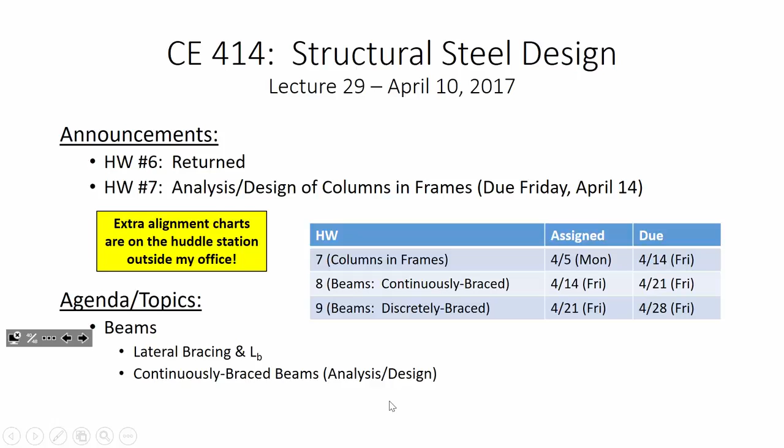The one thing I do want to show you all a little bit on this homework is problem 1. I do want to spend some time on that because I know there were some odd plots. First off, your plot should have looked like this, okay? It should have had this sort of shape to it. And in terms of constructing the plot, a couple of things.

Number 1, if you go to your handouts, I think it's column handout 2—yeah, this one. And you look right on the first page, there's your equations right there. So they were literally right there. The only thing this does not have is phi, you have to adjust it by 0.9. So let me show you how I did this.

What I did is I have KL over R from 0 to 200 right here, and I have my elastic, or Euler buckling capacity calculation. Now, at KL over R equals 0, you're dividing by 0, so it's essentially infinity, but it doesn't really matter, which means your F critical is 36. But the big thing I want to show you is this formula right here.

So here's what this formula is saying: it's basically one big if-then statement. It's saying if your KL over R is less than or equal to 4.71 times the square root of 29,000 divided by Fy, whatever Fy is, then your capacity is 0.658 raised to the quantity Fy over Fe, times Fy, or it's 0.877 times Fe. And that's it. Then just copy and paste, to make sure you're locking in your Fy, because that doesn't change.

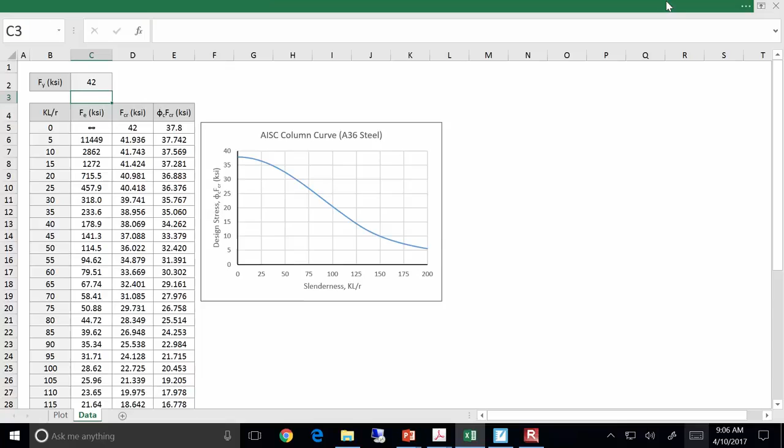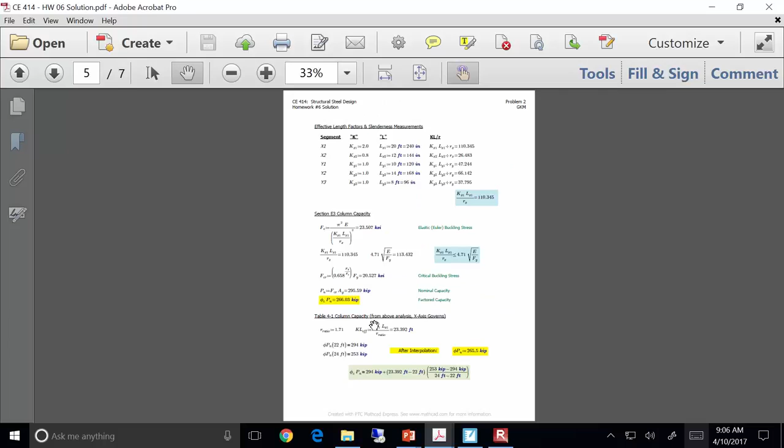Okay, now for the rest of the solution, let's see. I think the big thing was just making sure you're getting the right lookup values. Let's see, I think your KL over R for problem 2 ended up governing in the x-axis. It was about 110.3, that was your KL over R.

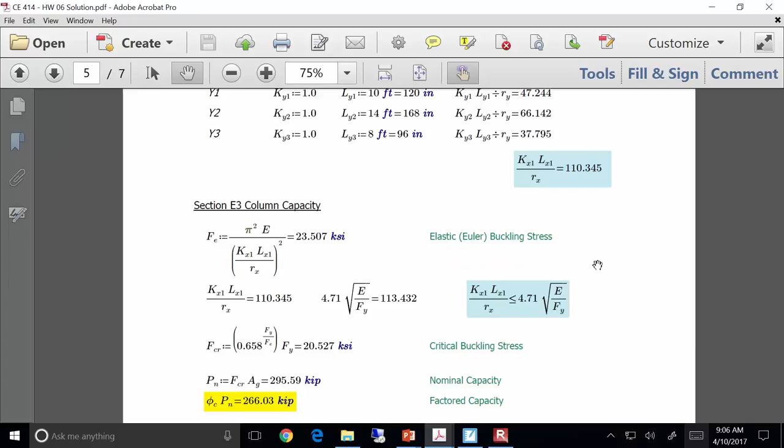So when you calculate your capacity using E3, you compare KL over R to 4.71 times the square root of E over Fy, and it's just on the other side of that, so you're still using your 0.658.

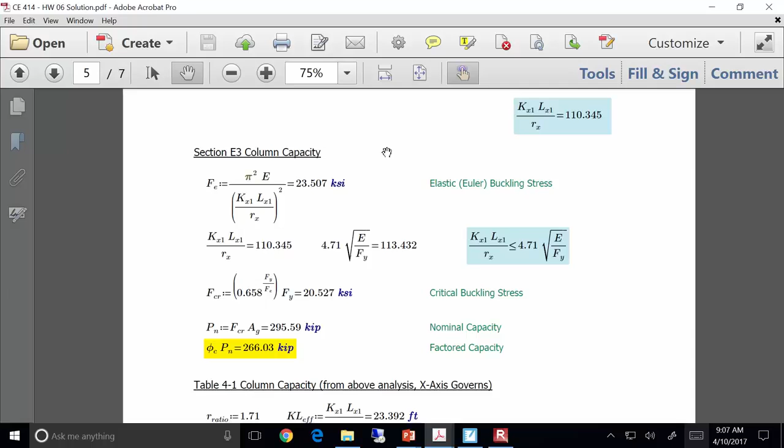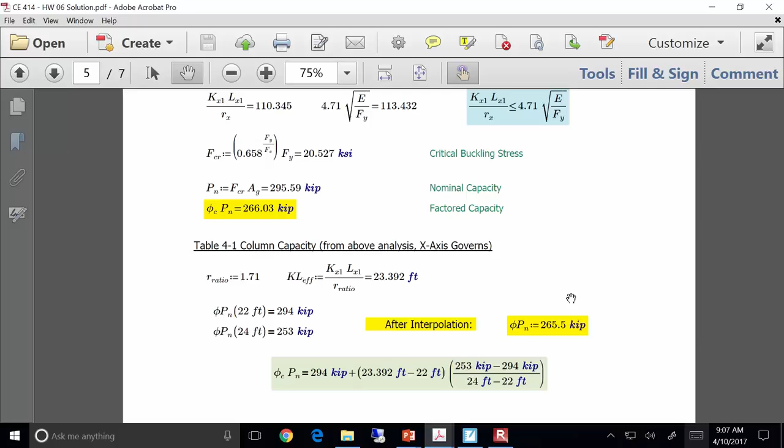You should get a capacity of around 266 kips. Now if you use Table 4.1, you end up getting 265.5. And that again just comes from interpolation, just the fact that you're assuming it's a straight line. You're assuming it's a straight line when you do interpolation, but it's not -- that's obviously not a straight line. Okay, so make sense?

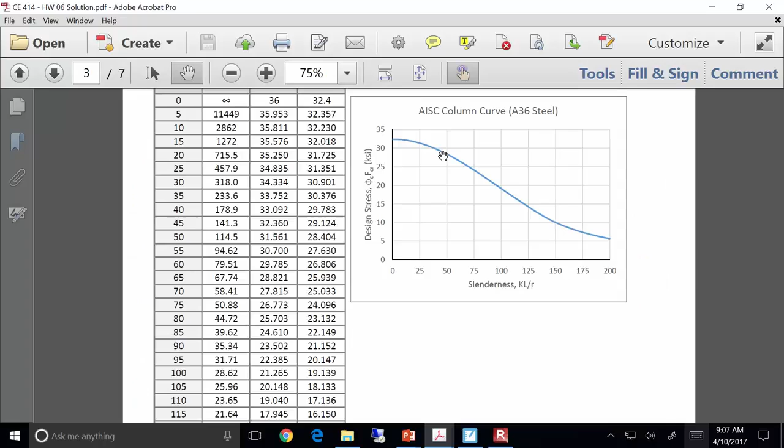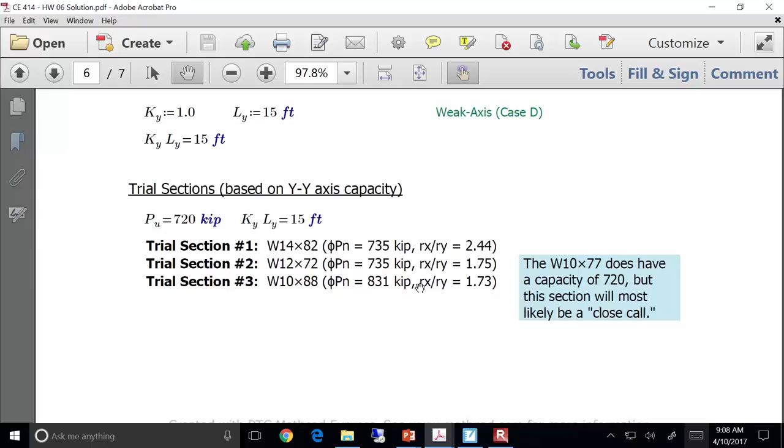Okay, now on problem 3, a couple things. So here were my trial sections. I chose a 14 by 82, a 12 by 72, and a 10 by 88. Technically I could have chosen the 10 by 77, but I think when you actually go through and choose that, you can look at it and see that's probably a close call, since its capacity is, in fact, exactly 720. So when you do your interpolation, you can probably make a guess and say it's not going to work. But I want to show you something.

So let's take a look at this. Your KL in the x direction is 36 feet, and your KL in the y direction is 15 feet. Now if you take each section one at a time, let's take the 14 by 82. Your Rx over Ry is 2.44, so if you calculate your KL effective, you get 14.75.

Now that value is less than this. Okay, and because it's less than this, you know that your weak axis governs, and whatever you looked up in that table is the capacity. So I can tell you right now, without doing any more work, the W14 by 82 will work. It will be one that works.

Now because the W14 by 82 works, I didn't even waste my time doing the W10 by 88, because if the W14 by 82 works, why would I check one that's heavier? It'd just be wasting my time, because I know this one works. So my efforts from here on out are going to be on the W12 by 72.

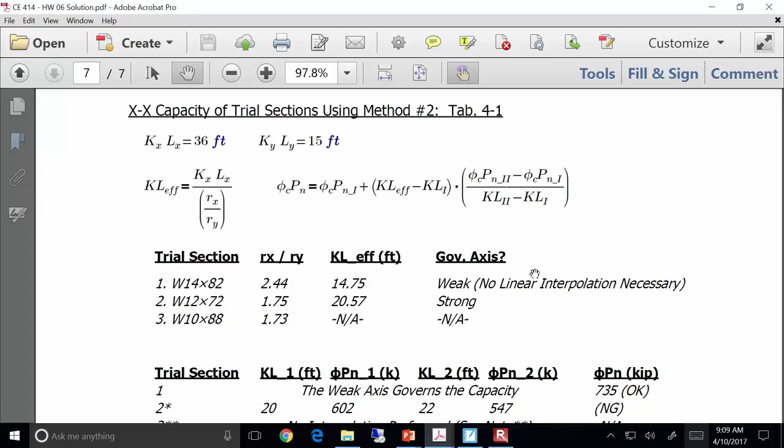Now when I divide by Rx over Ry, I get 20.57. If you compare that against this, it tells you that the strong axis governs, so you need to do a little bit of interpolation. But when you look at the interpolation you would do, you'd be interpolating between, it's what, 20.57, so you got to look up the value for 20. And since there's no value for 21, you got to look up the value for 22. So you'd be interpolating somewhere between 602 and 547, and whatever the value is between those, it's less than 720, so you don't need to do the interpolation here either.

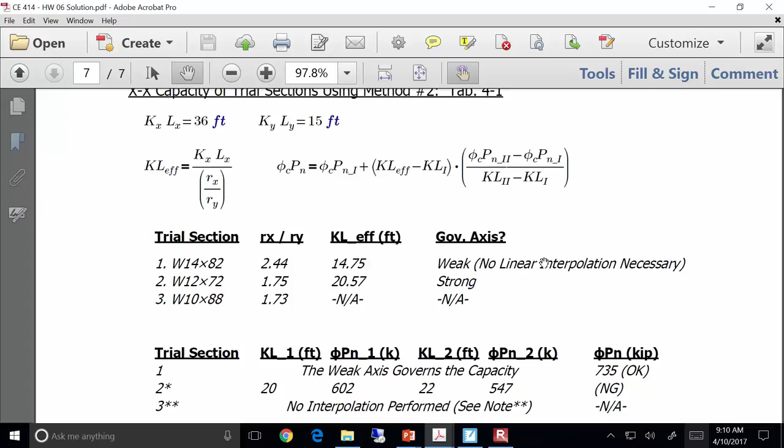So the W14 by 82 works, the W12 by 72 doesn't work, and I didn't waste my time doing the other one because it's heavier than that one. So my answer is the W14 by 82.

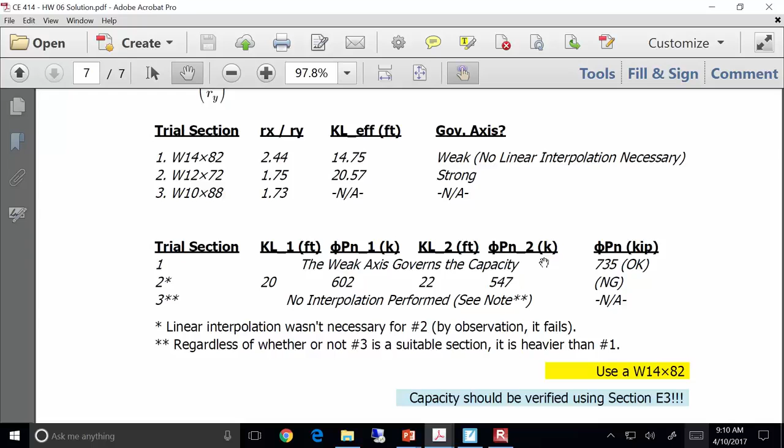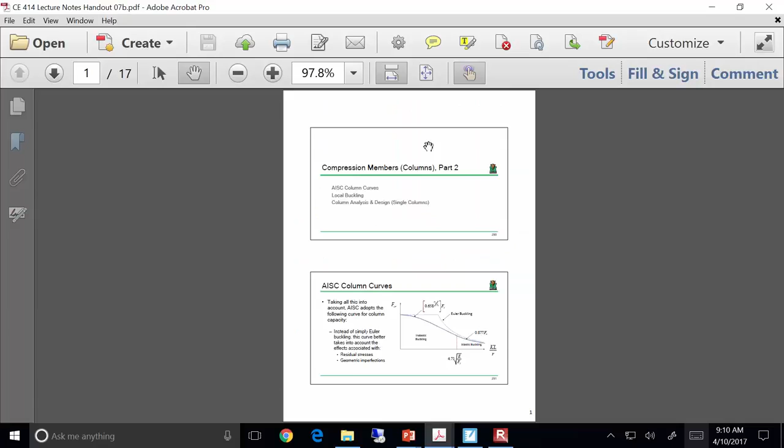Yes? So how did you determine the K values on those? Okay, let me see. Was it this one? Actually, I think it was this one. Let me see. Nope, it wasn't this one. It was this one.

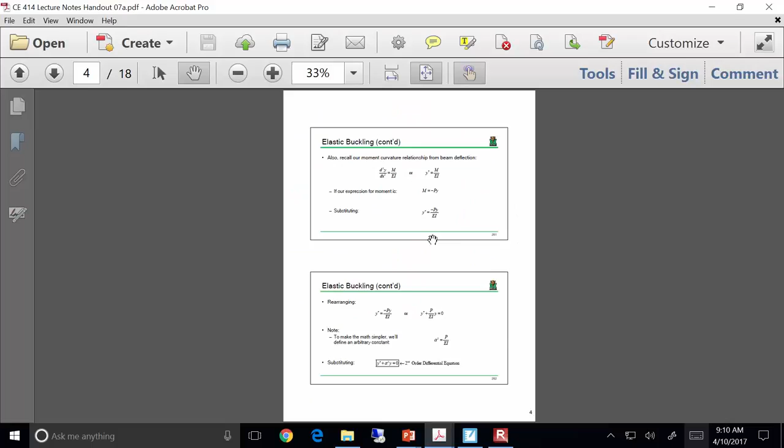Okay, first off, I can see where there would be some mix-ups there. I was trying to match the symbols on the homework exactly to the symbols in the manual. So if you notice, like that one column, it's not fixed, it has that block. Do y'all see what I'm talking about?

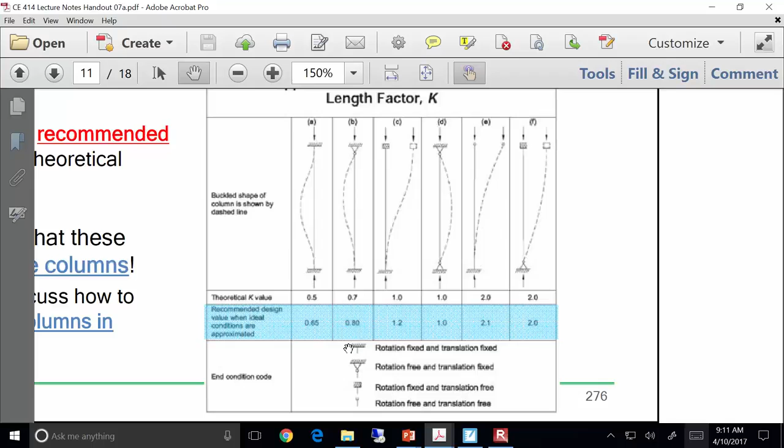The difference between, like, if you look at column A versus column C - actually, let me pull it up in the slideshow because it's a little pixelated here. Was it slide 276?

Here we go. Let's look at the difference between A and C. So if you notice, A is fixed, fixed, and C is kind of fixed, fixed. The difference between this boundary condition and this boundary condition is this one is allowed to move. It's not allowed to rotate, but it's allowed to move.

See, I was using these condition codes right here to draft out those symbols. So if you have a column that's fixed on the bottom, but the boundary condition on top is fixed against rotation but free to translate, that would be case C, and your K value would be 1.2.

Does that make sense? What's an example of that particular boundary? A moment frame, or something like a moment frame. Because what's the difference between a brace frame and a moment frame? A moment frame is allowed this way.

But you are correct - if you were actually doing a moment frame, you would probably end up using the alignment chart anyways. But to add a little bit of reality to it, when we did a lot of moment frame problems, we were getting K values like 1.2 and what have you. In fact, when you do your homework assignment, you probably are going to get K values around 1.2 for some of those columns.

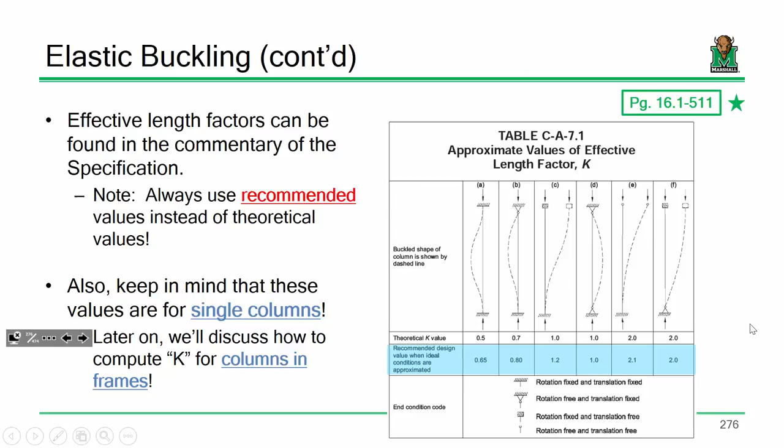Okay, all right, now what slide was I on? It was on something like this.

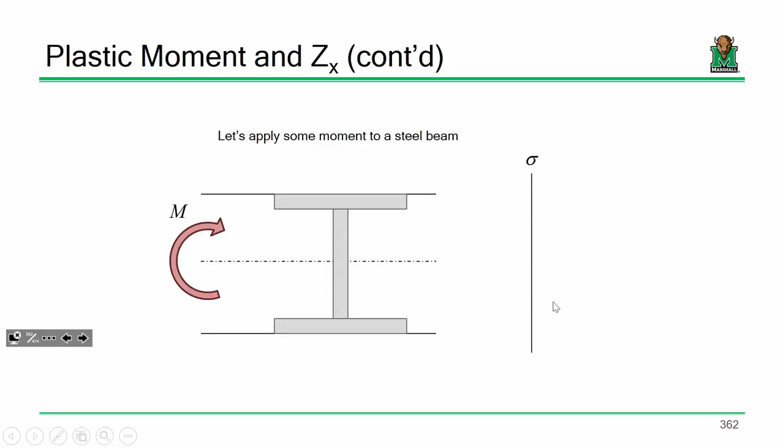So if you recall, if you have a beam and you apply some moment to it, it starts off behaving elastically, okay? And it will behave elastically until you reach the yield stress at either the top or the bottom of the section, assuming it's symmetric. Now in mechanics of deformable bodies, that's where we essentially assumed that everything stopped - once you reach some limiting stress at the extreme fibers, you're done. But in reality, that's not the maximum moment that a beam can withstand.

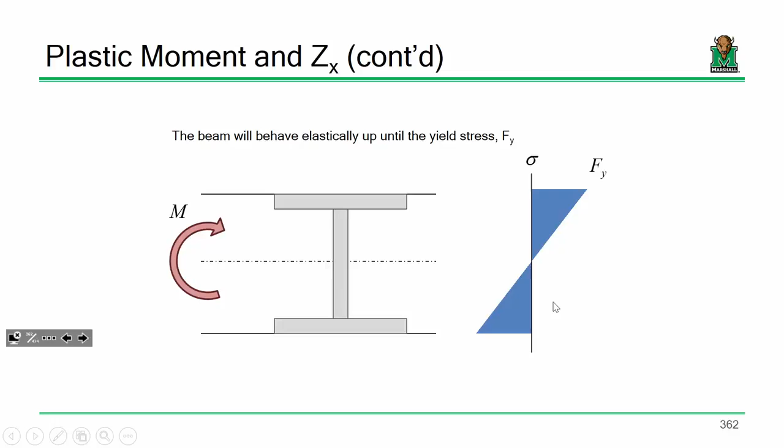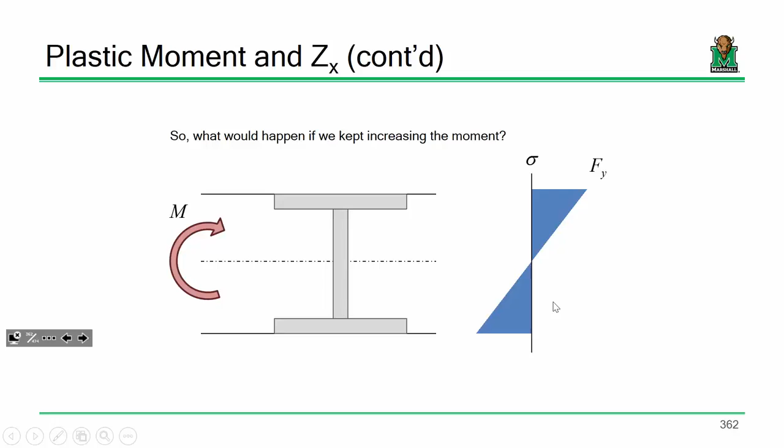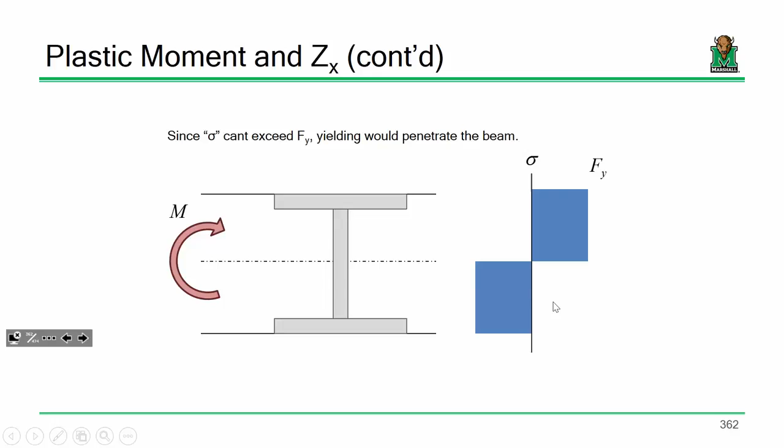Now if you keep applying moment to this, what happens is, well, the very top and the very bottom have yielded, but that doesn't mean that this is yielded or that's yielded or any of these points in the middle. So once you keep applying moment, that yielding penetrates throughout the section to the point where you've yielded the entire cross-section, and that's the point that matters. We call that the plastic moment. Any excuse I have to show that slide again, I will, because that slide's awesome.

All right, let's get to it. So last time we did an example discussing plastic moment and a new section property that we discovered called ZX. And ZX is essentially a little bit different than something like a section modulus.

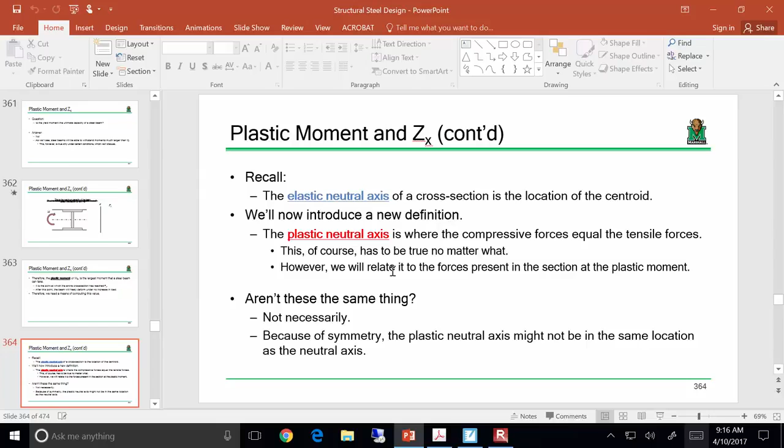Elastic section properties and whatnot are defined based off the neutral axis, or where the centroid is. Whereas plastic section properties are more about where the area above a given line equals the area below, because we're talking about compression equals tension, and they're not necessarily in the same spot. If you go through and do the math, you'll find that in many cases the location of the centroid and the location of the plastic neutral axis are in two different spots.

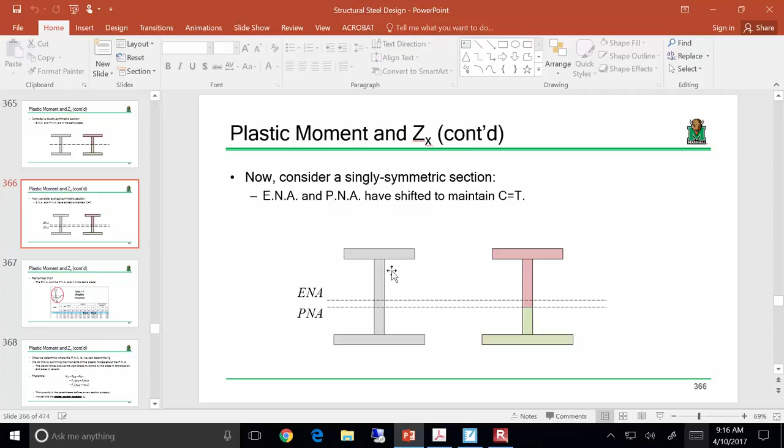And I even mentioned this in tension members a while back. I said, we have Y bar and we have Y sub P. And when we were doing tension members, I said, don't use the Y sub P.

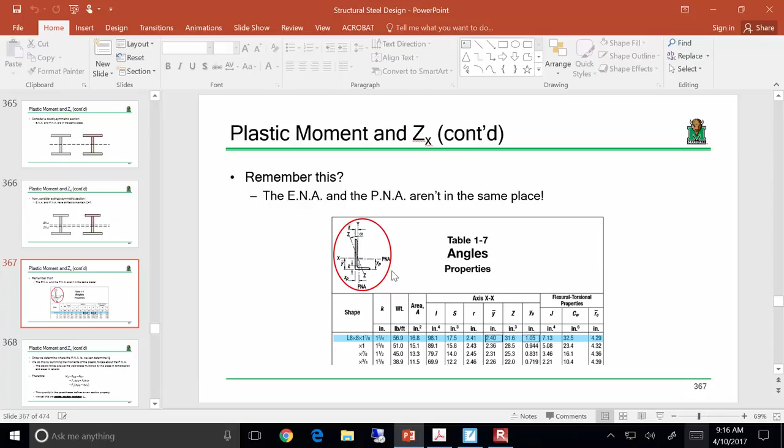Well, now you know why, because they're referring to different properties. We did an example where we computed the location of the PNA, ZX, and ultimately the plastic moment.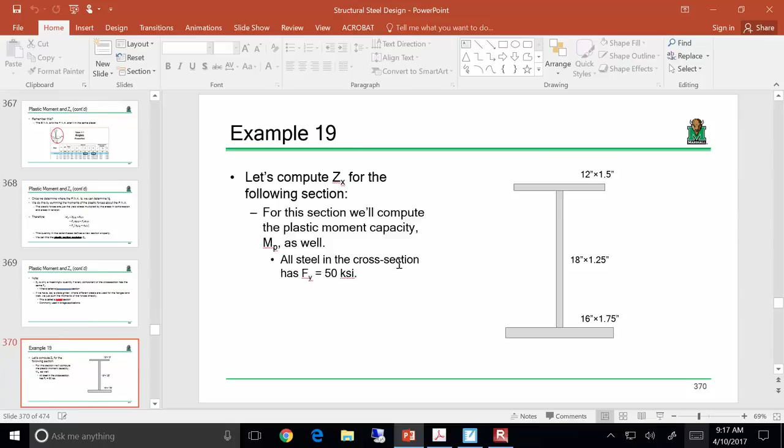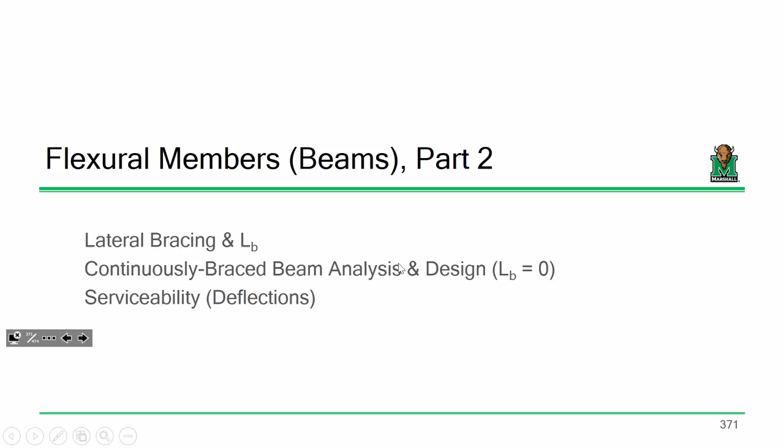Okay, so far so good? Okay, so now let's talk about beams. Let's talk about how to actually proportion them, analyze them, design them. In order to do this, this is going to be a discussion that we have for the rest of the semester.

We're going to start off making an assumption that LB equals 0. Now what's LB? We mentioned this last time. LB is essentially the distance between bracing elements for a given beam. So like with a column that was 30 foot long, we really didn't care about the overall length of the column when we were determining capacity. We cared about the distance between unbraced segments, or the distance between bracing elements.

So if we had a 30-foot long column, but there were simple braces every 10 feet, when we computed capacity we just said the L was 10 feet. We didn't say it was 30, right? Same thing is true with beams. It might be a little more confusing with beams because when you compute the forces, the moments, WL squared over 8, you're using the whole span length, but you might not be using that for the unbraced length. So it's just something you got to make sure you're paying attention to.

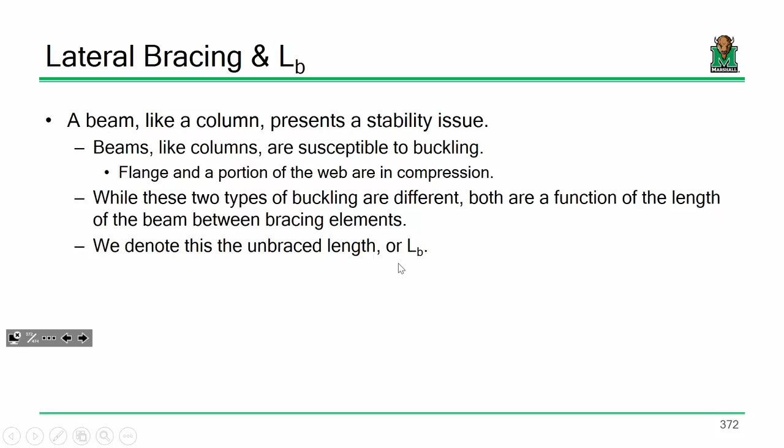Now, some examples of lateral bracing. What I mean by lateral bracing is trying to prevent a beam from moving to the left or right. So there's a couple examples of that. One might be something like this: if you have a composite slab with shear studs welded to the top flange, and that slab is locked in with that beam, then that beam cannot move to the left or right at all.

So the way we would describe this beam is as having continuous lateral support. LB is the distance between braces. What we'd say for a beam like this, because it is continuously braced, is that LB is 0.

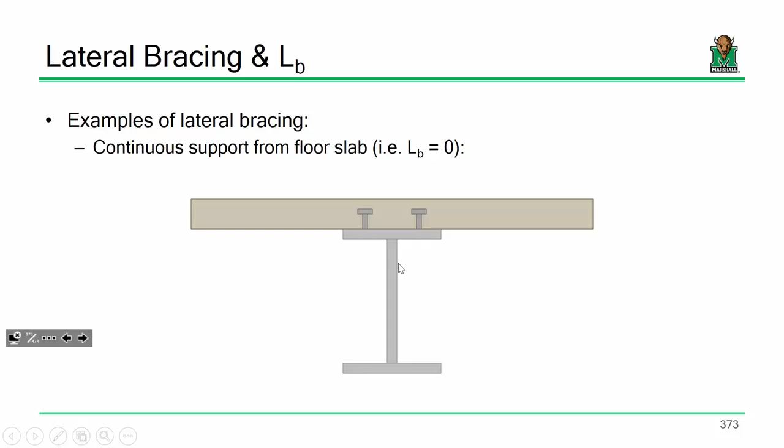Does that make sense? Everybody okay with that? Now here's another example of lateral bracing. If you've got a floor system and you just have beams framing into one another - for instance, if I was looking at this girder, the span length of the girder might be something like 30 feet. But the unbraced length, the LB, might only be 10 feet, because it might only be 10 feet from this beam to this beam, and those beams are preventing that girder from moving to the left or right.

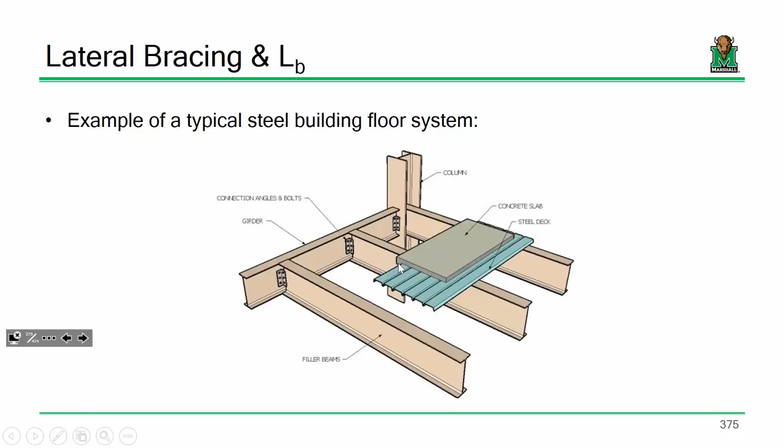Another example, more common in bridge applications, is the use of a cross frame. For instance, some of these girders might be 100 feet long or so - that girder on the right might be a couple hundred feet long - but the unbraced length, the L sub B, might only be something like 20 to 25 feet, because that's the distance between those braces. Those look like inverted K-frames or something like that, and on the image on the left, just X braces and what have you. Does that make sense? Anybody have any questions about this?

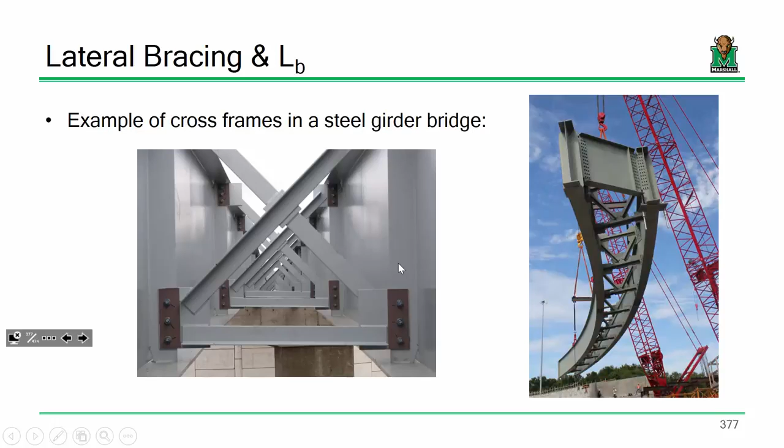This isn't too bad, right? The big thing is I just want you to understand the difference between how long a girder is and the distance between its braces, okay? For the first component of this beam design stuff, we're going to be assuming LB is 0, and the reason why is because we're assuming there's no buckling going on. We're going to assume no buckling now, and then later we're going to ask, well, what if we did have to account for buckling, which is the case in a number of scenarios, and then we'll go into that.

Okay, now if I'm designing a beam, I really have three things to consider.

Those of you in concrete design, or who've already had concrete design, could probably spit this stuff out by now. When designing beams, we really have three things to consider from a design standpoint: moment, shear, and deflections. We need adequate moment strength, adequate shear strength, and adequate serviceability considerations met. Now let me say something real quick on shear.

If you're designing something like a plate girder in a bridge with a really thin web, shear becomes a much bigger deal. The design for shear is somewhat analogous to what we did in concrete design for stirrups. Instead of laying out hooped rebar or stirrups, we're laying out stiffeners. You've probably driven down the road and seen an older steel bridge with vertical plates on the web of the girder. That's what those vertical plates are doing—they're there to help the girder's capacity in shear.

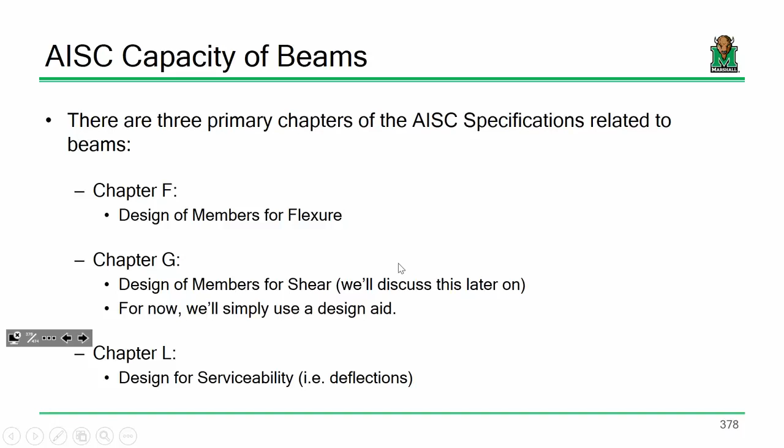Now speaking of the manual, let's talk about some tabs. If you notice in this class, I never gave you a beam design aid—I gave it to you in concrete design, but not here. The reason is it's in the manual. If you open your manual, this is page 3-something in the front matter. Go to the gold tabs, the one that says beam, near the last chunk of that section on 3-213. You'll notice a table, Table 3-23: shears, moments, and deflections.

There are dozens of different scenarios and loading considerations—for instance, case 1, a simple beam with a uniformly distributed load, arguably the most common instance of beam loading we see. Maximum moment: WL squared over 8 at midspan. Maximum shear: WL over 2. Maximum deflection: 5WL to the 4th over 384 EI. Those of you in concrete design right now, that stuff should be pretty familiar.

So you know where that is. The only thing I'd pay attention to is the variables going into it. If you're doing something with triangular loads, make sure you're using the right units and the right input to get the values you're interested in. Other than that, this is a pretty straightforward guide and a really, really useful one.

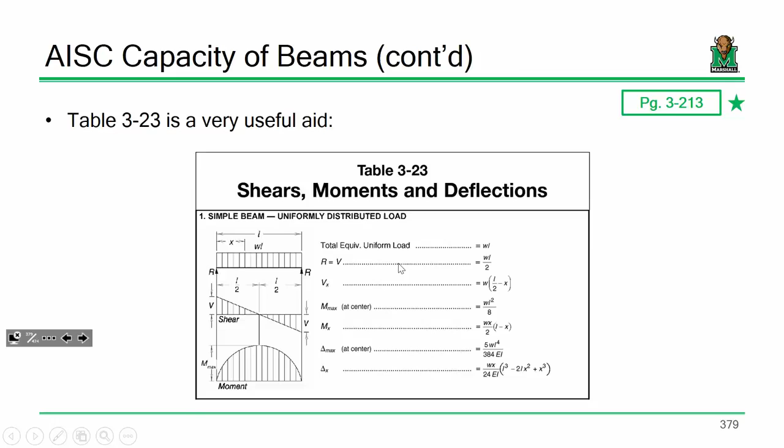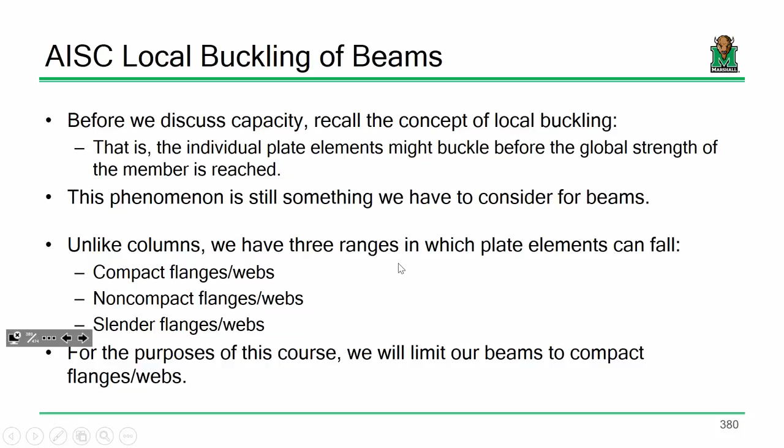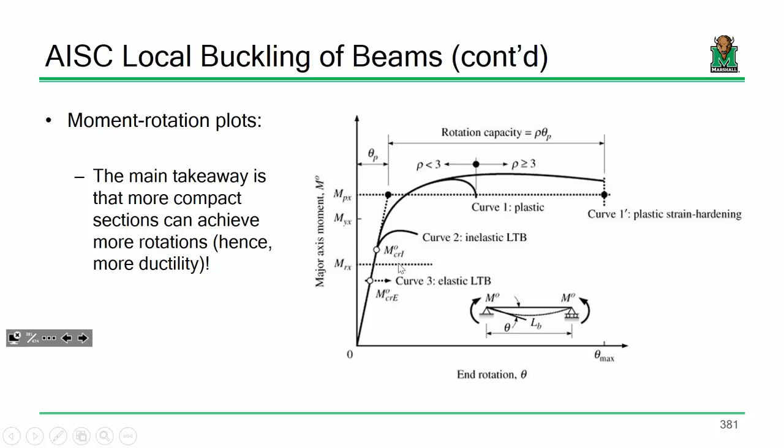Now, one thing I'll go over real quick—if you remember with columns, the concept of local buckling: instead of the whole column buckling, maybe it's just the flange that buckles, or maybe it's just the web that buckles. You'd check that by comparing the slenderness, BF over 2TF and H over TW, against certain limits. Well it's the same thing with beams, though the limits are a little more intricate—but for our purposes it doesn't really matter, and I'll explain why. Beams, because of their behavior, instead of splitting them into two categories, we split them into three. With columns, we'd say elements are either going to buckle or not, comparing against something like 0.56 square root of E over Fy, or 1.49 square root over Fy. With beams, we're a little more intricate: we say beams either aren't going to buckle locally, they'll buckle locally in an inelastic fashion, or they'll buckle locally in an elastic fashion.

Only for our purposes, I don't think it really matters, because the long and short of it is this: if you go to 16.1-17, I want everybody to go to that. You should have that tabbed already if you haven't already tabbed it.

So that's this table right here, 16.1-17. I want everybody to turn to that. That one should be tabbed. I hope it's tabbed. They do not tab it. Okay, tab around it.

16.1-17. Now if you look over here on the left, the table on the left should be very familiar. Y'all recognize this? That's the one for columns, right? Well, look at the one on the right. The one on the right is for beams.

You'll notice there's two limiting ratios, lambda sub p and lambda sub r. For our purposes in this class, we're only going to care about lambda sub p, and more often than not, all of our beams are going to meet these requirements.

You will find some beams that don't meet these requirements. In other words, we do have local buckling considerations. Fortunately, a lot of the design guides we use take this into account. I want you all to at least check these on your homework problems, but it really shouldn't be a major concern. Don't worry, we'll have some practice going into this.

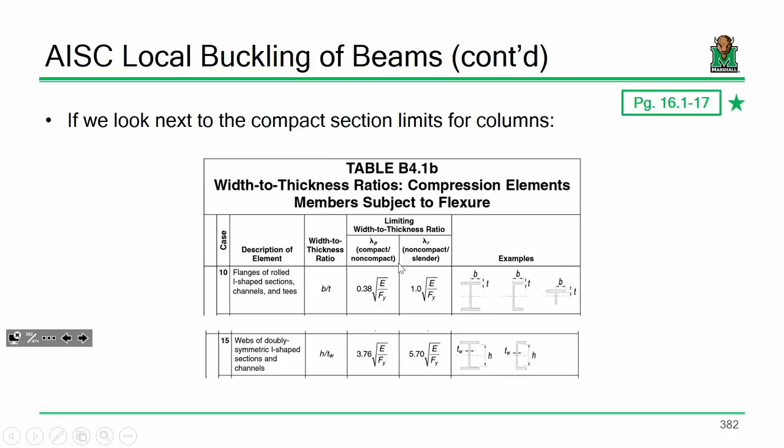Now, if we are talking about a continuous braced beam, in other words, a beam where buckling isn't going to occur, then I propose that the capacity is just MP, the plastic moment. How do we compute MP? We take Fy and multiply it by its Zx, the plastic section modulus. Everybody okay with that?

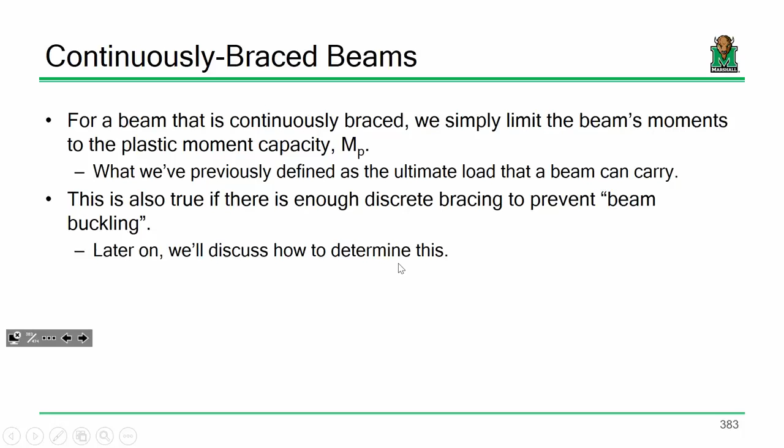So here's the capacity of the beam in bending that isn't going to buckle: Fy Zx. The phi value is 0.9, and this is going to be our capacity expression for the first beam component of this class, Fy Zx.

Now, just real quick on units, when you calculate this out, Fy is in KSI, Zx is in cubic inches. So when you compute your moment, it's going to be in inch-kips, so you need to make sure and divide by 12 to get foot-kips. Sound good?

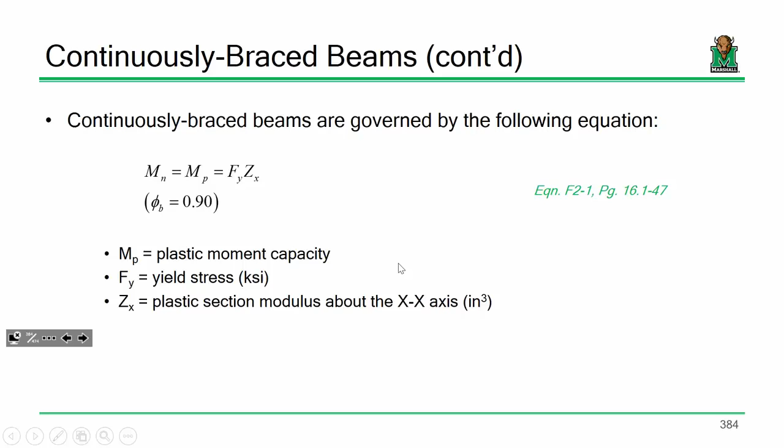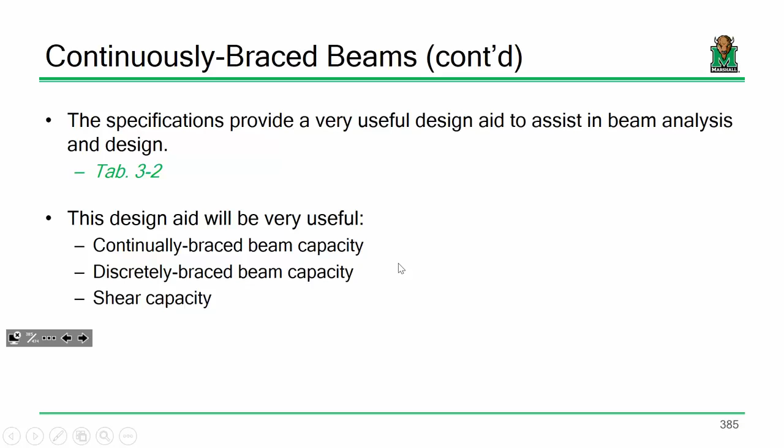All right. Now, I've had you all tab a couple things just now. If there's one thing I really, really want you to tab, it's this. It's table 3-2. We will use table 3-2 for the rest of the semester. So I want everybody to turn to table 3-2 right now. It starts on page 3-19. That definitely needs to be tabbed. We will use that for the rest of the semester.

Now, if you'll notice, there's a lot of information here. Yes?

Now, I really want you all to pay attention to this table because there's a lot of incredibly useful information in this table, okay? First off, this table is called the Zx table because the shapes are organized by their Zx. If you notice, the Zx values are going down, that's how they're organized.

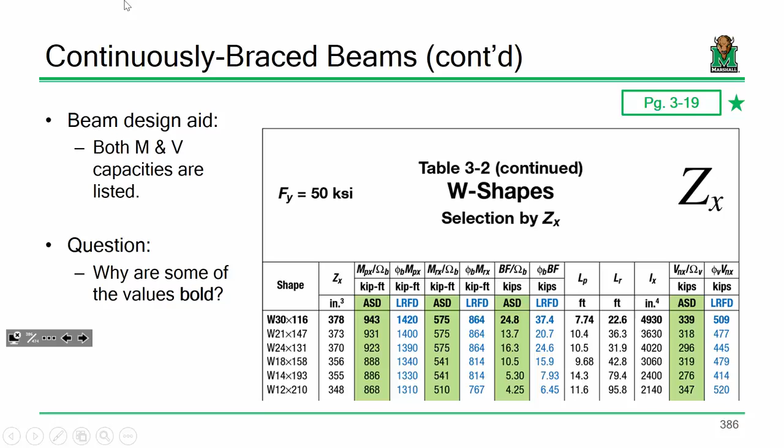Okay with that? Okay. Whew, allergies are getting... now what the... there we go.

Yeah, we're done with the class. Okay, a couple other things. All right, so...

We've got moment covered and we've got shear covered. For now with shear, we're just going to look it up. What about deflection? Deflection's kind of funny - I'd argue that this is the one thing I have an issue with the steel manual in general.

The concrete spec actually lists out deflection limits. It says you will not design a structure that deflects more than this, and it actually specifies it - it's right there. The steel spec does not.

If you go to chapter L of the spec, this is what it says on deflections: deflections in structural members shall not impair the serviceability of the structure. And that's it. Not very much to go off of, is there?

So the code does not actually specify deflection limits. Like in concrete design, we'd have deflection limits like L over 360 or L over 240 or something like that. The steel spec does not actually specify them. I wish that they did, but they don't.

But a couple things - number one, deflection shall not impair the serviceability of the structure. When you all took concrete design and did deflections in concrete, what did we not do to those loads? We didn't factor them. We didn't factor them then.

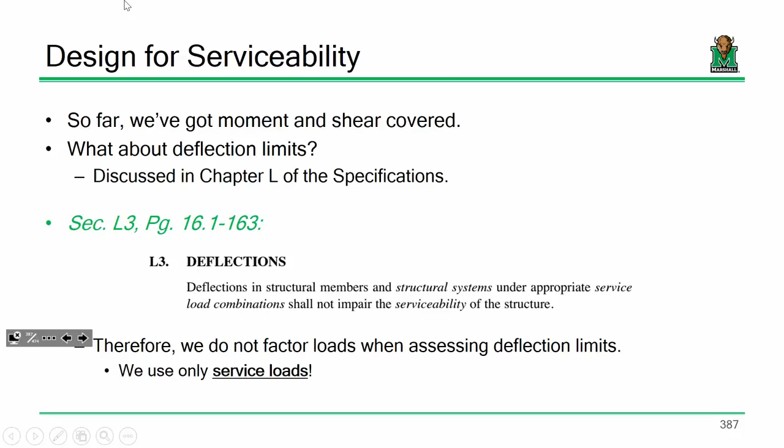Point two, just because the deflection limits are not in the manual does not mean that they are not available. One thing I would suggest everybody in this room do is go onto AISC's website and become a student member.

Okay, I'm serious about that because one of the things I think AISC does right—and I'll admit, I truly believe they do this better than the concrete industry—is they make a lot of their design resources available online, and available for free.

Especially if you're a student. To become a student member is pretty straightforward, and once you become a student member, you get access to a number of design guides.

These design guides cover things we don't really cover in class but you may see in your career, like designing for torsion. We do our best to avoid torsion in structural engineering, but sometimes it's unavoidable. We don't have time to talk about it in class, but that's where a design guide comes into play.

Each one of these design guides, I want to say, is somewhere between $25 to $50. I'm really not sure, but there's like 30 of them. You get them for free, so I would register for these.

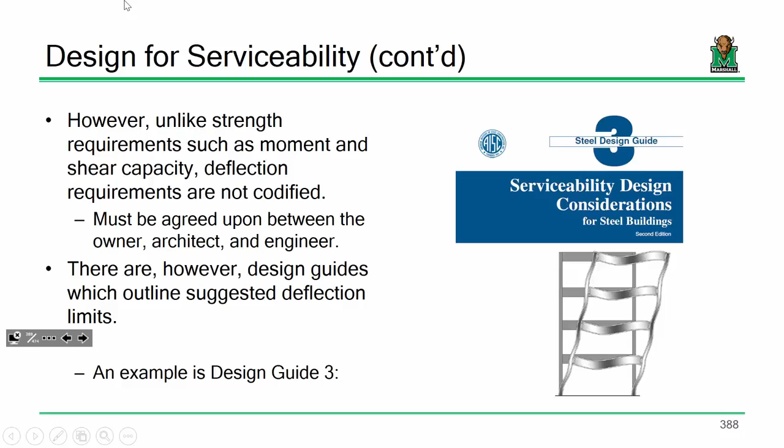One of the common ones, or very popular ones, is Design Guide 3. It's serviceability design considerations for steel buildings, and it outlines a lot of suggested limits for deflections. In the steel industry, the limits have to be agreed upon between the owner, the architect, the engineer, etc. But there are a lot of suggestions in here.

So for instance, these are some limits from Design Guide 3. If you're looking at a non-plastered ceiling—like this drop ceiling, you don't have that plaster on there—and we're talking about a floor beam, our vertical deflection might be limited to L over 360, or 1 inch, or what have you, in this case under the dead load.

A number of them are also limited to live load. For instance, if you're talking about a roof member, it might be half the live load on the roof, or the 50-year snow—whatever's going to govern, I guess would be the best way of putting that.

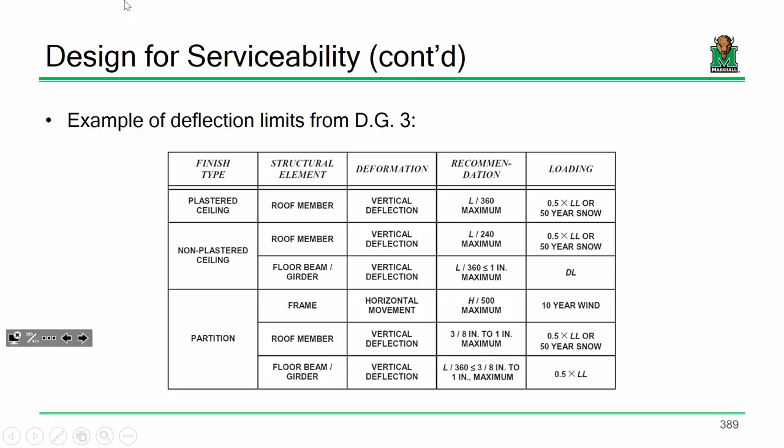Sound good? But let me also say, ultimately it is an agreement between the owner and the architect. In other words, if the owner and architect come in and say these beams can't deflect more than 1 inch under live load, well, that's what you're designing for.

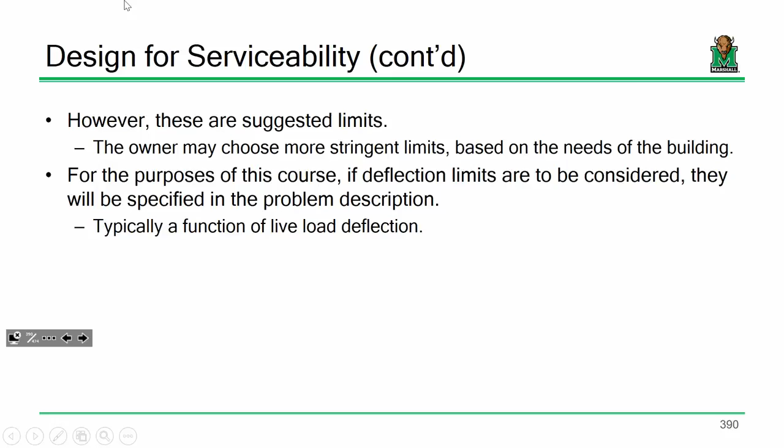So for the purposes of what we do in here, if there are deflection limits to consider, I'm going to give them to you. I'll say live load deflection is limited to 1 inch, or dead load deflection is limited to this, etc. Typically, they're a function of the live load.

If you find that deflection governs your design—if you designed a beam based on moment and find it's deflecting too much—then instead of going to the ZX tables, go to the IX tables. I've got a tab marking here, though you probably don't need to tab this since it's right behind the ZX tables—if you turn a couple pages, it's right next to them. Instead of organizing shapes based on their ZX, it's organizing them based on their IX, their moment of inertia.

Just like with the ZX tables, it's the same deal: they're broken up into chunks, and of these chunks, the one up top that's bolded is the lightest within the group and has the largest moment of inertia.

Why are the limits typically a function of the live load? That's a good question. The reason deflection limits are more often than not a function of live load is because we can usually account for dead load deflection through things like camber.

For instance, let's say there's a floor beam supporting this load up here, and the dead weight of the floor is going to cause this beam to deflect half an inch. I can take the beam and bend it upwards half an inch, so that when I put the dead load on there, it sits flat. In other words, I can usually account for dead load deflection pretty easily.

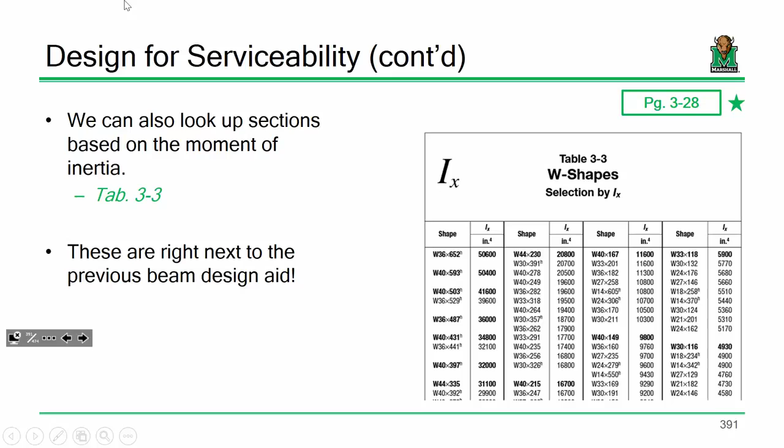Any questions? This is good stuff. I really want to make sure everybody's clear on this. Are we good? Okay, I think I've done enough going over a lot of the theory and the spec.

I think it's time to get into some example problems. You're going to find that in practice, with a lot of different design aids and tables, this is pretty simple.

See if it's adequate. So we have a W16 by 31 that's subjected to a dead load of 450 pounds per foot, not including its self-weight. We have a live load of 550 pounds per foot, and it's a 30-foot long beam that's simply supported.

Now we're going to calculate the moment capacity. We're going to look up the shear capacity, and we're also going to check to see if this beam, based on a service live load deflection limit of L/360, is adequate. Let's take it one step at a time. I think you're going to find this is pretty straightforward.

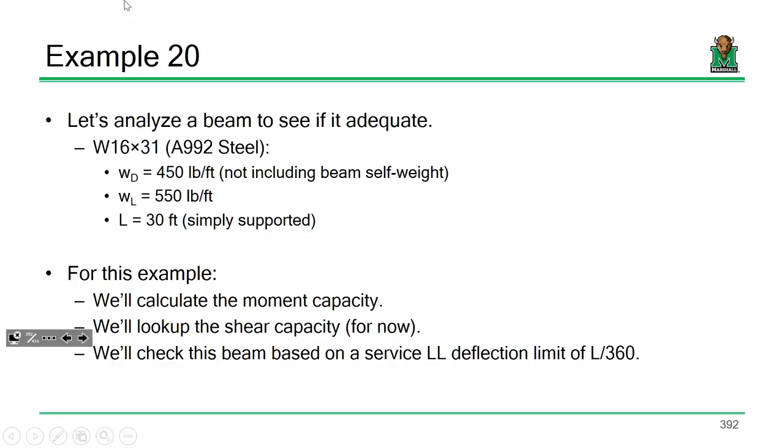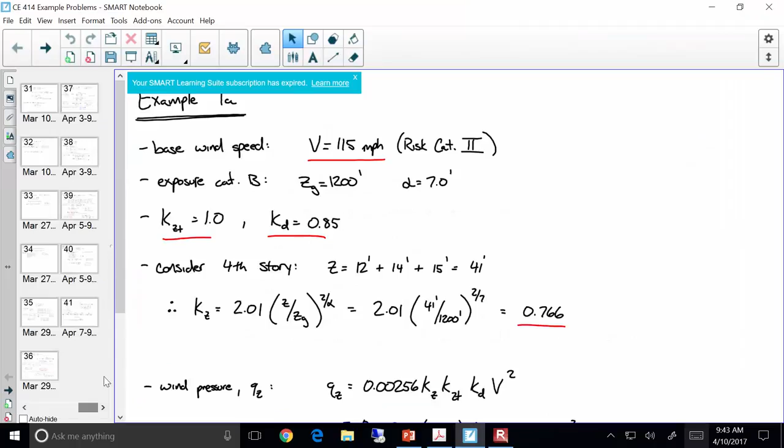Let's get all this out of the way. All right, let's start off with some structural analysis on this beam.

Now, what is the dead load on the beam? What is the self-weight? It's 31 pounds per foot. This one is picked - it's a W16 by 31, and a W16 by 31 weighs 31 pounds per foot.

Y'all remember this? Bringing it back, right? That's pretty much exact. And here's the thing - let's say you weren't sure how you'd find that out. You could take the cross-sectional area in square inches, convert it into square feet, and multiply it by 490. Remember, to get the self-weight of a beam, take its gamma and multiply it times its area. So you could do that, and you should get about 31 pounds per foot.

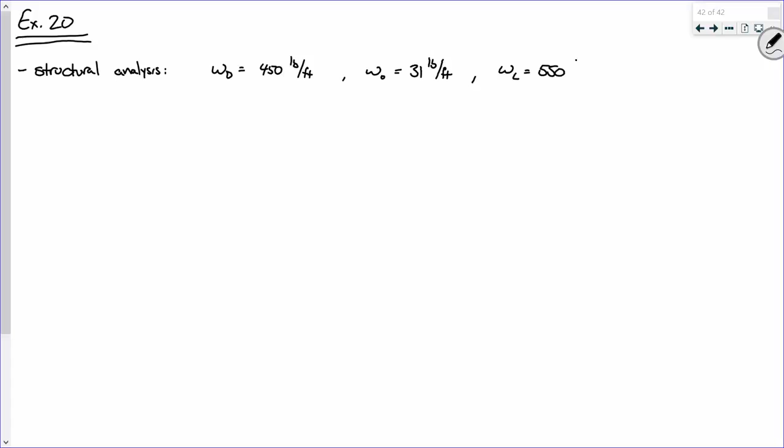Oh, you can do that. You asked the question. And this is 550? All right.

All right, so tell me what to do. By now you should know what to do with dead loads and live loads. We do this for moment and shear, not for deflection. Not for deflection. Well, why don't we do this: Wu equals 1.2...

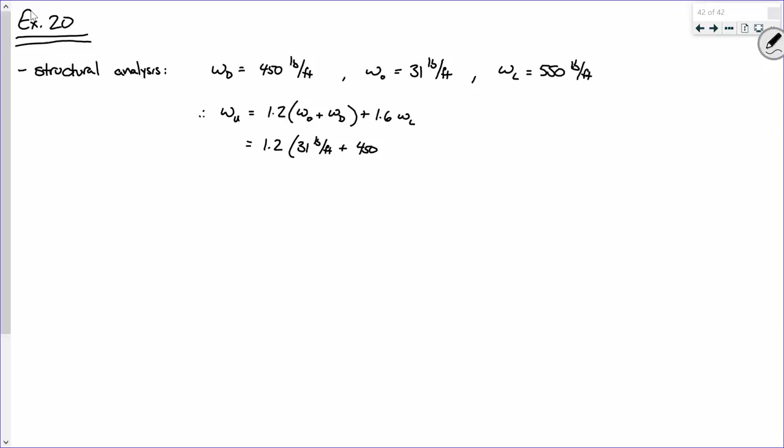Oh, come on. Okay, I think you can handle this. I have faith in you, Mr. Fadiga. What do we got? 1457 - we'll just keep it there. Do we have a second, Mr. Fadiga? Does anybody provide a second on this? Okay, now sir, come on now.

If you're panicking over dead loads and live loads, I'm wondering what a horror movie would do to you. All right, would it be fair to say this is 1.457 kips per foot? Okay, all right.

Now how do we get our factored moment? WL squared over 8, which it is. How long is the beam? All right, and what does that come out to be? 163.91. Do I have a second on that?